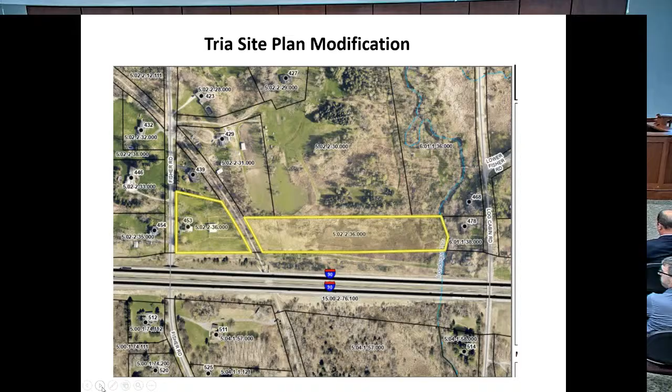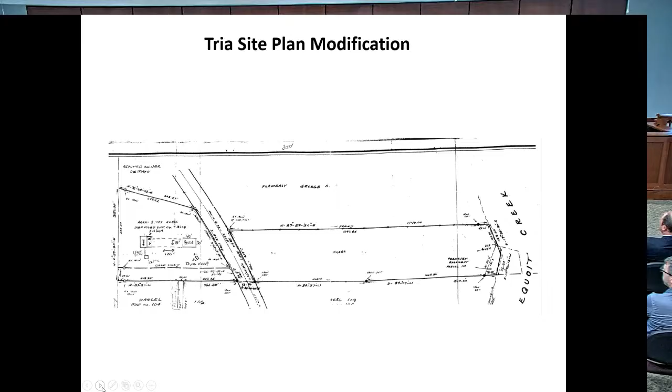Your property is bisected by the Auburn Trail, correct? Correct. Yeah, okay. As I was reviewing this information, I said, I've walked by that place before. So you currently have different farm animals on site. I think you had a horse last time I remember. That was the previous owners. Oh okay, just ducks. All right, just the ducks is what you're looking for.

Okay, so open it up to the planning board. Joe? It looks pretty straightforward to me. Okay, Al? No issues. Okay, Scott? I don't have any issues. All right, I don't have issues either.

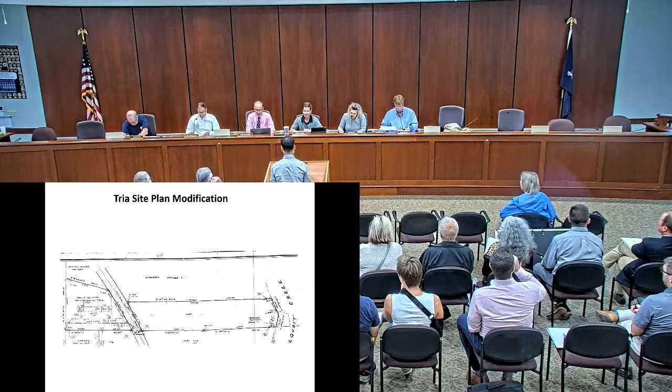It's certainly a perfectly acceptable place to put one, and as I mentioned earlier, you're in an LDD, so that's why you're before us, to give your neighbors an opportunity to comment. So it is a public hearing, and I'll open up the floor. Is there anyone here that wishes to ask questions of the applicant?

Okay, so I do have a question. I'm reading the letter from May 12th about future plans. Would he need to come back to the board for those? And we're only going to approve or not what he's requested, the pond and the fence, today?

Yes, if any of those future plans require approval because it's in an LDD, then yes, he would come before the board. And stopping in at the planning board office could give him guidance on that, right? Okay, yeah, thanks, so all right, sure.

Seeing no one from the public, I'll entertain a motion to close the public hearing. I'll move. Al moves, second? And Joe seconds. All in favor? Aye. Okay, public hearing's closed, unless anyone else.

Wes, any questions, comments? Okay. We did have a draft resolution prepared, so I think without objection, I believe we can move forward with this.

Whereas the planning board made the following findings of fact, and there are six of them, now therefore be it resolved that the application of Thomas Tria, site plan entitled Tria Site Plan Modification, located in the Limited Development District, be approved with the following conditions.

Conditions to be addressed prior to chairman's signature on the site plan: that no final signatures will be given on the plans until all legal and engineering fees have been paid per reimbursement law adopted November 25th, 1996.

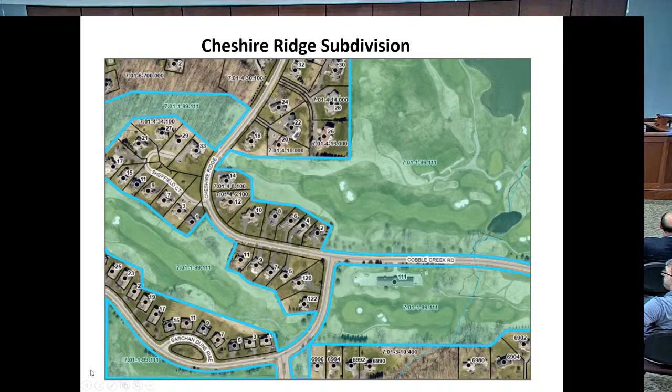Next one up, Cheshire Ridge sketch plan. This is not a public hearing. Applicants requesting acknowledgement of complete application to create 2 new single-family lots on a 3/4 acre site along the south side of Cheshire Ridge, up at Cobblestone. This is the first step of a major subdivision, and only acknowledgement of a completed application will be considered at the meeting.

Good evening, I'm Ryan Destro from BME Associates, here on behalf of the applicant Cobblestone Creek LLC. We are here for a sketch plan application for the Cheshire Ridge subdivision. It's located at Cobblestone Creek. This proposal is for a subdivision to create 2 new single-family lots on .74 acres, as mentioned.

It's along the south side of Cheshire Ridge, and it's in between 11 Cheshire Ridge and 1 Sheffield Court within the Cobblestone Creek subdivision, and the property is zoned residential R-2.

Just to give a quick recap, the preliminary subdivision approval for the overall Cobblestone Creek development was granted by the planning board on June 27th, 1989.

The approval, which included 282 single-family lots, was granted under Section 281 at the time, which is now Section 278 of Town Law, and also Article 5 of the Victor Town Subdivision Regulations.

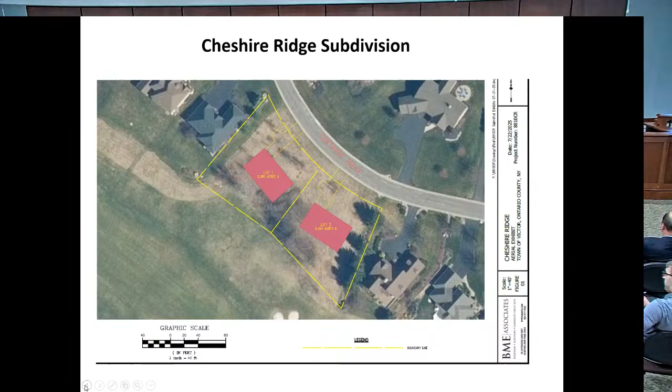Now, while 282 single-family lots were approved, to date, only 270 single-family lots have been created. The existing adjoining lots were established in 1997 as part of Section 4 of the Cobblestone Creek development.

The proposed 2 new lots, as shown on the screen, have been designed to meet all applicable bulk lot standards of the existing adjoining lots as part of the Section 4 approval, with the exception of lot depth.

The minimum lot depth for the new lots is proposed to be 127 feet instead of 150 feet, and this is really just to provide an additional buffer between the Cobblestone Creek Country Club course and the proposed single-family lots.

As such, we will be requesting that the planning board modify the clustering provisions that were established for the existing adjoining lots as part of the Cobblestone Creek development, and this would be to allow the minimum lot depth of 127 feet for the two new lots.

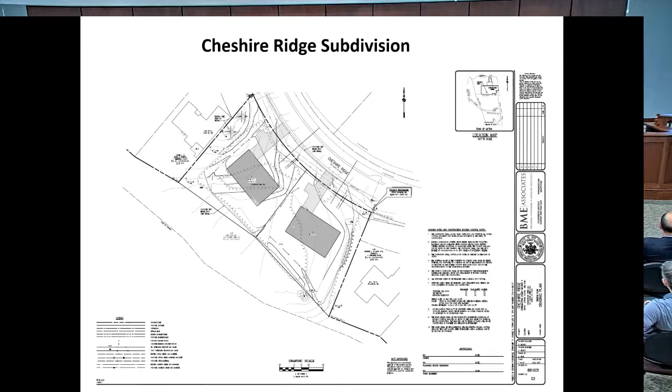With regards to utilities, both lots will be served by public water via new service connections to the existing Monroe County Water Authority public water main, located along the north side of Cheshire Ridge, and then connections to the existing public gravity sanitary sewer system and storm sewer system along the south side of Cheshire Ridge will also be made via new sanitary lateral and storm lateral connections.

With regards to stormwater management, the proposed soil disturbance for the two single-family lots is under 1 acre. Therefore, New York State SPDES general permit coverage for discharges from construction activity is not required, nor are any new post-construction stormwater management facilities required per the New York State DEC Stormwater Management Design Manual.

With that, as mentioned, we are seeking acknowledgement of a complete application for the sketch plan application tonight. We did receive just a couple minor comments from the town engineer as well as the town code enforcement officer, to which we've already responded in writing yesterday in a letter dated August 25th, 2025. With that being said, I'm happy to answer any of your questions. Thank you. Thank you.

We'll start on the left this time, I guess. Scott, anything? I don't have a lot of applicant questions.

The one question that did pop up is relative to lot depth. Looking at your plat, it looks like you have 150 feet on the west and east sides, but 127 in the center.

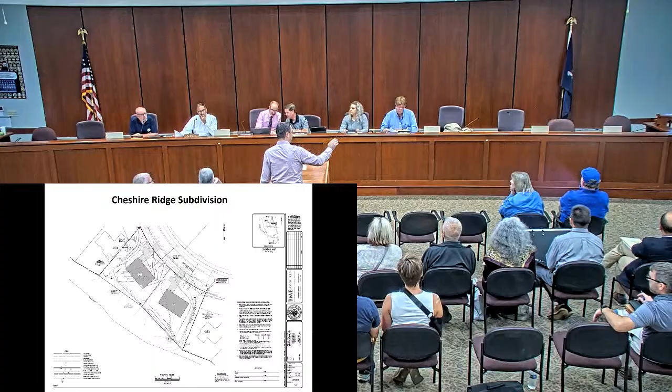You can see the edge of the fairway, and there's a little bit of a drop-off area just over the sand traps on the lower portion of the aerial. So it's really just to provide an additional buffer for those lots.

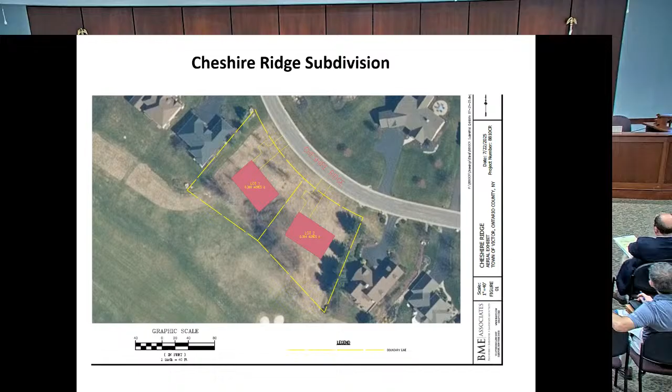Okay, I have no more questions. Al? So were these lots not part of the original plan approval? Correct, we're creating two new lots that essentially, you could make the lot lines effectively any way you would like to. Okay, yep.

No other questions at this time. Okay, Joe? I'm interested in what the town engineer's comments are, though. He's always got interesting things to say.

Well, some of the issues are a little arcane, and I think he's better suited to speak to them. Oh, okay, thanks Joe. Sure. Wes Petty, Labella Associates. So we had a comment letter, we published it on August 15th.

We're just looking to have a short EAF prepared when they submit a preliminary application. And on lot standards notes, there were a few notes on this sketch plan that I had a question on, just looking for them to confirm the proposed rear yard setback.

Supposed to be a foot symbol, it was just a typo. Well, and then in addition to the inches versus feet, the graphic shows a 40-foot rear setback as opposed to a 30-foot.

So maybe we'll double check that. Yeah, we'll check that at preliminary as well. Not a huge issue for sketch plan. And then just identify that the driveway setback should read driveway setback to side lot line.

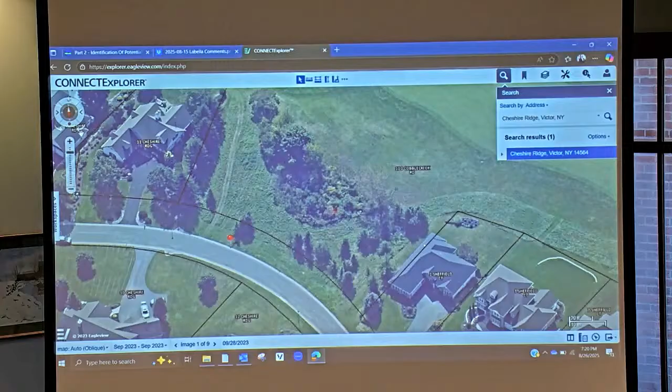Because we really do need to make these lots comply with the town code as much as possible, especially when it comes to a side setback on the adjacent parcel so close to the line. That really restricts their access to the side of the house with anything but a 3-foot wide lawnmower. Just saying - understand, we can only control these two lots, but we'll certainly reach out and see if there's anything that can be done.

All right, did that help? Yes, it did, thank you. Yeah, that's the only thing I see as a major concern from my perspective. Okay, and as Wes indicated, I think we're in pretty good shape for the sketch plan completeness, so we can move forward with your application by agreeing you've provided the complete sketch plan, and then we can move on with questions at the next review.

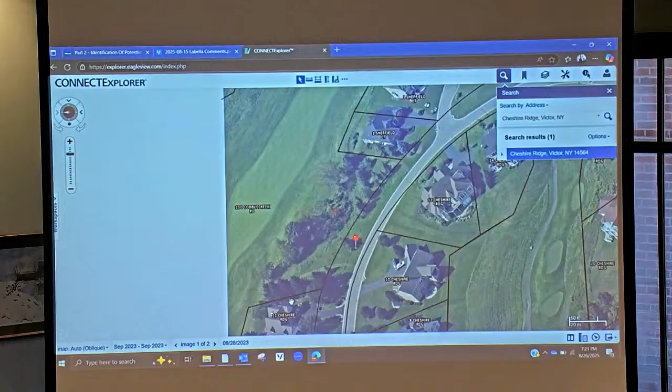So, Wes, did you bring it up? Yeah, I've also got the Google Earth image here. Okay, you can zoom in on that upper left there?

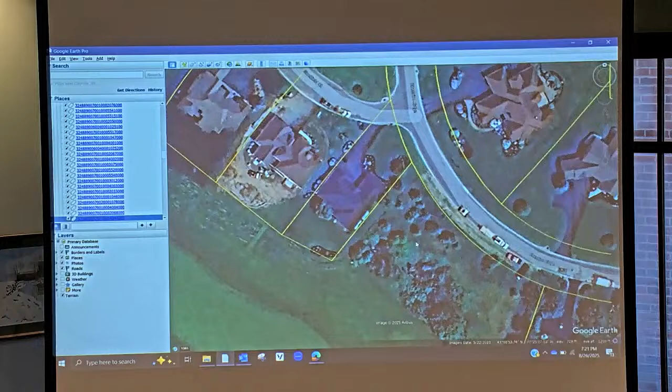So, just for the benefit of those here, this is the lot line, and there's 3 feet between there and the house, but there's a lot of landscaping that - I know these are just tax map lines - has gone quite a bit beyond the lot line, all along the side of the house. So maintenance of that would be an issue, ownership for sure, and I think we really need to address that more formally in the next step of this application. That's my opinion. So, any other comments from the board?

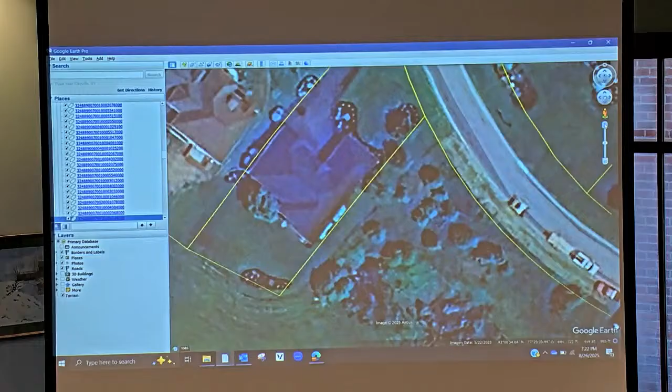Questions? I agree with your comment. Good catch. Okay, having said that, thank you, Wes, for bringing that up.

Susie, can you switch back to the agenda items again. We do have a resolution for sketch plan completeness that we'll move forward with.

On the Cheshire Ridge subdivision sketch plan application, number 1 SK 2025, whereas the planning board made the following findings of fact, there are 6 of them. Now therefore be it resolved that regarding the sketch plan application of Shale Kessler, Cobblestone Creek LLC, major subdivision entitled Cheshire Ridge subdivision, drawn by BME Associates, dated July 2025, received by the planning board July 22nd, 2025. Planning board application 1 SK 2025.

The planning board acknowledges receipt of a complete sketch plat application, and be it further resolved that the planning board secretary forward a copy of this resolution to the applicant. Hear a motion? I'll move it. Scott moves, and Joe seconds. All in favor? Aye. Okay, excellent.

Thank you for your time. Thank you.

The next item is Norbut Solar Farm. This public hearing was closed at the last meeting. The applicant is requesting approval to develop a 4.428 megawatt solar energy facility on a 34.93 acre parcel consisting of forest and meadowland.

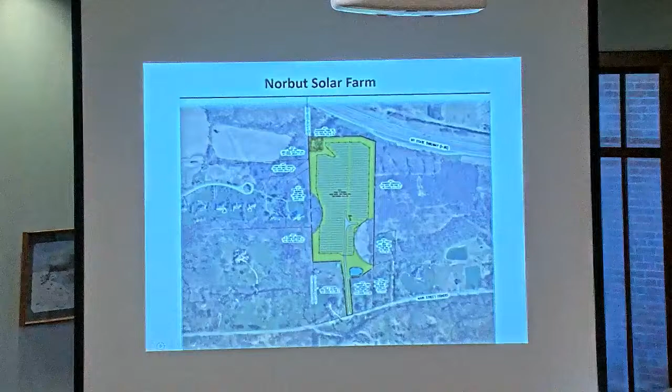One thing I do want to point out, within the first 20 feet of our access drive, there is a 100-year floodplain that clips the bottom portion of our property. Whether that counts as development on the land, there's already an existing driveway curb cut there, but we are going to rebuild that driveway and bring it up to standard.

Yeah, I think that's a good point. It's not something that we've necessarily overlooked in this regard. If you want to acknowledge that as a planning board, that yes, there is a floodplain, it's over a portion of the entrance drive at the intersection with.

The residents have mentioned that the water does run down that driveway. Yep, and there was a concern expressed that the upgrades to the driveway would facilitate water coming down there. So I think maybe that should be a small impact, so we can say yes.

I think Mr. Limbeck, the driveway that the residents have been talking about is this driveway over here that's not associated with our access drive. The floodplain portion I'm talking about is right at our entrance.

I thought the driveway on the property was where they mentioned the water comes running down the hill. Oh, I thought that was the Gray residents that were talking about the water running down their driveway, not ours. No, I think they were talking about it. I could be mistaken, but I thought it was the driveway on the Norbut property.

So we could say technically yes, and no or small impact to every one of these squares. I agree. And if you put yes down, at least you're acknowledging, as James brought up, that there is a very small portion of the 100-year flood zone.

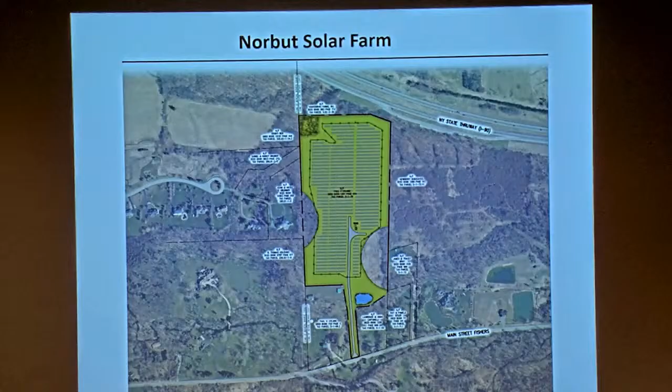Okay, that's it. And Mr. Logan's correct, we're generating energy, we're not using any for this. It says increase in the use of any form of energy, so to me they're providing the ability to increase, but they're not increasing the use of. That's how I interpret that. I'm okay with a no.

Number 15, we're almost there. Impact on noise, odor, and light. The proposed action may result in an increase in noise, odors, or outdoor lighting. Yes, there will be an increase in noise during construction. We don't anticipate odors from the project. We don't anticipate lighting from the project.

Question A, the proposed action may produce sound above noise levels established by local regulation. Answer to that is no. B, the proposed action may result in blasting within 1,500 feet of any residence, hospital, school, licensed daycare center, or nursing home. The answer is no, there's not going to be any blasting. C, the proposed action may result in routine odors for more than 1 hour per day. Answer to that is no.

D, the proposed action may result in light shining onto adjoining properties. A small impact in that regard when we're considering glare. E, the proposed action may result in lighting creating sky glow brighter than existing area conditions. No impact in that regard.

So for the small impact on D, we would also want to note there are mitigating elements of the project. I think what we would identify in the reasoned elaboration is that the project is designed with solar panels that have an anti-reflective coating, and the applicant has also submitted a glare analysis that identifies certain times of the day, certain hours within the day, and certain days within the calendar year when this glare may impact an adjoining property.

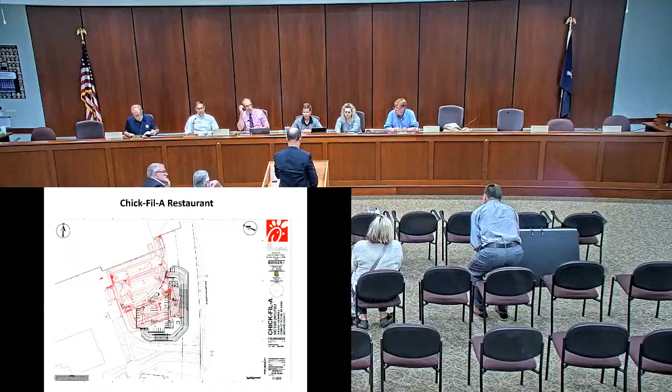Good evening, Mr. Chairman, members of the board. My name's Charlie Gottlieb. I'm the Land Use Counsel for Chick-fil-A from Whiteman, Osterman, and Hanna in Albany, New York. Here this evening with Randy Bebout from Bohler Engineering, our project engineer, and Eric Wright behind me as well, who's representing the property owner, Eastview Mall LLC.

The project is a 5,397 square foot quick service Chick-fil-A restaurant with a dual lane drive-through throughout, located on the southeast corner of the Eastview Mall property. We were previously before this board on July 22nd, where we showed an alternative layout that pulled the building as far out as possible from that no-build area, which is a restrictive covenant on the property.

We did receive the planning board's informal consent on the alternative location, and we were told to come back with the no-build covenant itself for review and approval. Since then, we have also received a building determination from the code enforcement officer detailing out what area variances and sign variances are required for the project.

We do plan, if I have my way, submitting to the ZBA tomorrow, but definitely this week, to further the ZBA's review. We also submitted from Bohler Engineering, to further this board's site plan review, a response to comments we have received thus far, a revised environmental assessment form, lighting specifications, a revised engineering report, stormwater pollution prevention plan, a geotech report, sign survey, building elevations, and a revised site plan set based on this new alternative design.

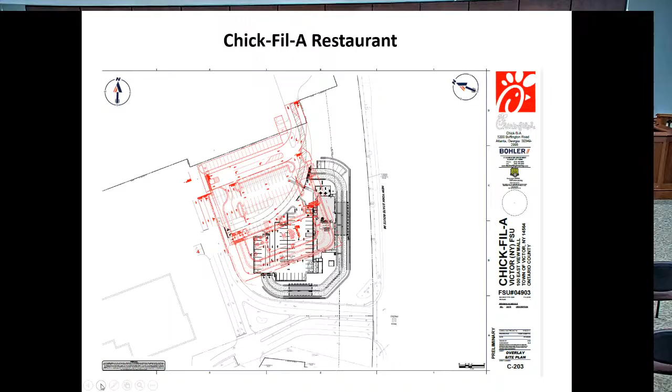You also recently received from my office a submission that did include what we're going to call the second amended restrictive covenant, which sets forth what the new no-build area will be after the project is developed, as well as another revised environmental assessment form, this time indicating that the Zoning Board of Appeals is an involved agency because we need those variances, and also indicating in the description that we are seeking an amendment to the no-build restrictive covenant.

The next steps: we believe that this planning board should serve as the lead agency for this under a coordinated review with the Zoning Board of Appeals, meaning that no action on this project can be taken until this board issues what we hope to be a negative declaration. Tonight, we would like the board to declare that intent, and we also would like your informal straw poll vote on the second amended restrictive covenant that is before you.

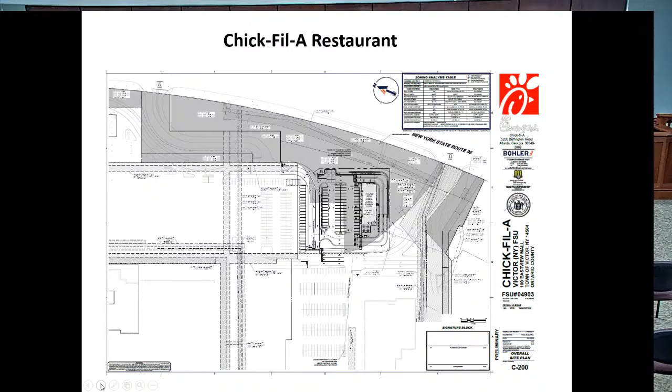We will continue with the planning board until you are comfortable making a lead agency determination. Simultaneously, we will also be going with the ZBA, but the ZBA cannot determine anything until a negative declaration is issued. Once we get the variances from the ZBA, we then come back to this board to finalize your site plan review. So with that said, I know you have a restrictive covenant amendment in front of you. It has been reviewed by Chick-fil-A, by the property owner, and revised based on comments we received from the planning board attorney as well as the planning board engineer. So if there's any questions, we're here to answer them.

Our office worked with the applicant's counsel in preparing and finalizing what's before you as the second amended declaration of restrictive covenant. We are in agreement with its form and terms and conditions. It has exhibits attached, including the old metes and bounds description, the map of the new hatched area, and a metes description of the hatched area being modified. So in terms of its form and content, we are satisfied. It's now up to the planning board as to the substantive nature of modifying the restrictive area.

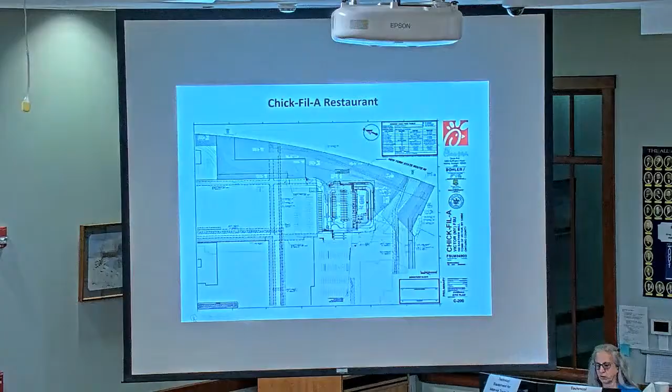And the other comment I had was it's kind of an odd traffic pattern coming out of the Chick-fil-A. Once people have picked up their food on the drive-through, there's a lane that aims right at one of those lanes coming out, right there. Now Susie, do you have any more zoomed-in site plans? Okay, yep.

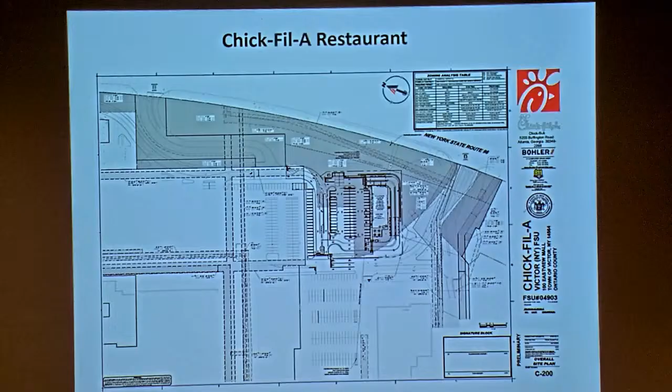I'd like you to look at the traffic pattern in the site coming out. You've got people coming in the entrance that's basically the out entrance from the drive-through. If you look at those two arrows going toward the drive-through, that seems a hazard, because you're telling people to come out and then take a right out to go to the central exit entrance of the mall, and there's cars coming in at that location. I would almost say that should only be a double exit out. This thing right there, yep.

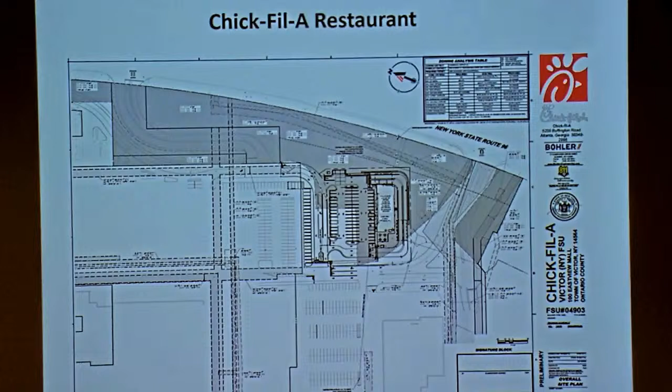I think you shouldn't even have a left turn lane coming from this direction into here, because you're telling people to go to the drive-through down there or coming into the site. They could easily come in and park, or come in and go through, and eliminate this counter traffic pattern.

Yeah, we'll review that. And I know you made a revision — originally the dumpster was in a slightly different place, and the exit — but that was a concern of mine.

That's a good comment. And then just a comment on the grading, all around here, trying to keep the wall at a lower height. And yes, you're right, we are grading in the no-build area.

So to me, it's a significant amount of intrusion into that grassy area. I know there are some pretty large trees in this area, at least, and perhaps over there, that would be nice to try to save. I know they don't have to be right where the wall is, because you can't save them from the root systems, but I want to make sure that this area, which is mowed regularly, can be mowed all the way down to the wall. Yeah, it is a 1-on-3.

Is it? Yes. Okay, so it is mowable. Well, that's all I'm asking — to take a look at it and see if maybe we can save some of it. But those two items I had.

Great, you were looking for comments to address at the next review — that's very helpful. So those are things I thought of since then. So having said that, I think we've done...

It actually is a public hearing, so I should probably make the podium available if there's anyone here that wishes to comment on it. It's not going to be closed yet, so there are other opportunities.

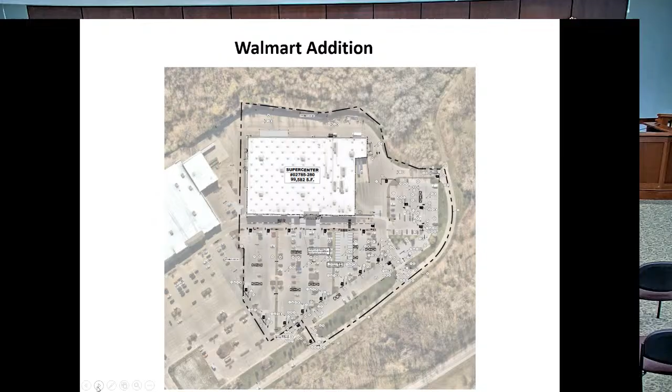The existing store is 99,582 square feet, and I apologize for the amount of numbers I'll read off tonight. The proposed building expansion is 1,974 square feet, in place of the existing asphalt at the rear of the store. The new square footage will be 101,556 square feet, bringing the total retail square footage of Victor Crossing to 335,261 square feet. There will be no impact to any existing green space or pervious areas.

The intention of the expansion is driven by operational needs to sustain current service levels, and it is also intended to improve the online pickup and delivery operations.

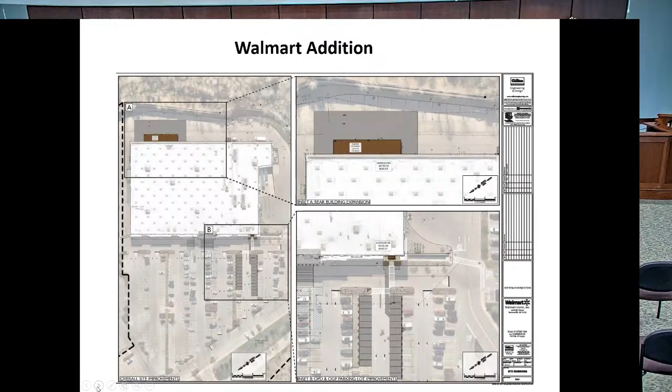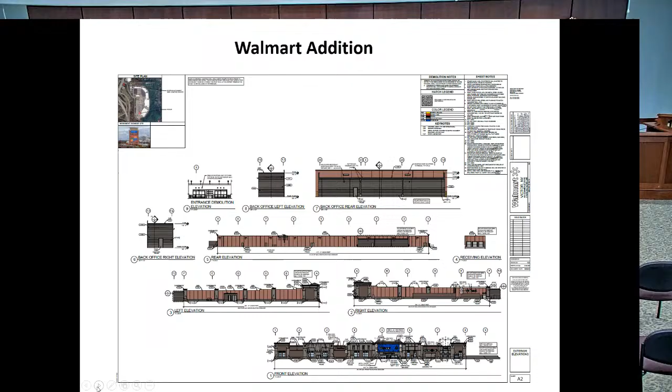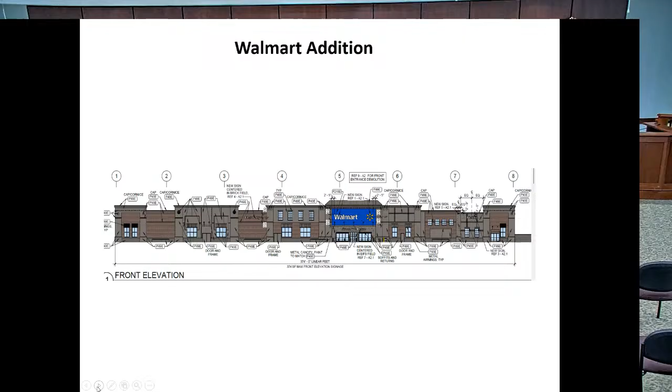The exterior elevation sheet, A2, shows the exterior paint and signage updates. The existing gray color will be refreshed to a slightly darker gray, and behind the Walmart sign will be painted blue in place of the gray background to match Walmart's current brand standard. The total building sign square footage will be reduced by approximately 199 square feet. The signage emphasizes a simplified look that minimizes visual impact while maintaining the brand's visibility.

We are below the maximum allowed foot candle level of 10 FC max at grade. The bulbs will be replaced with LED bulbs without reconfiguring any wiring or placement of the light fixtures. The expansion will also include the required emergency lighting, and the existing rear wall packs located on the back of the building will be relocated to the new expansion wall. Thanks to the height of the retaining wall, there is no light spill beyond the property line.

Fixtures are full cutoff and do not shine above the 90-degree plane, making them dark sky compliant. We would also like to acknowledge that the proposed project seeks an amendment to the board's final environmental impact statement, or the FEIS, to raise Victor Crossing's total permitted retail area from 323,287 to 335,261 square feet, and the individual building size limitation of 100,000 square feet to 101,556 square feet. Walmart remains committed to preserving the site aesthetics, safety, and full compliance with all applicable regulations, and the expansion improves long-term store efficiency to better serve the community. Thank you.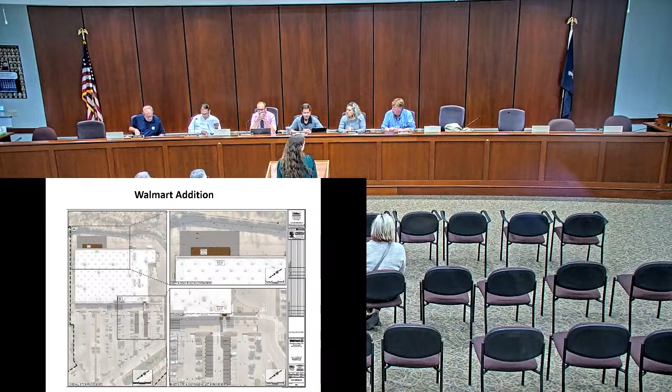Thank you. Questions from the board for the applicant? Joe, we'll start with you.

It's all one, I believe, combined into one application. So we did get the Walmart addition first, which requires planning board approval. The Planning and Building Department also did receive two building permits for lighting and one for signage, which also requires planning board approval. So we had asked Walmart to please combine them since there is a lot with the Walmart. So this was more for you guys as an introduction, because there is still some things missing. But yes, we did ask them to combine them into one planning board submission. So, piecing it together, thank you.

Having said that, because the building expansion itself is on the back side of the building, it doesn't seem to have any impact on slope or lighting. I don't see an issue there. And from what I can see, just looking here, I don't think there's issues with paint or signage either. So, from my admittedly quick review, I don't have anything really further to say.

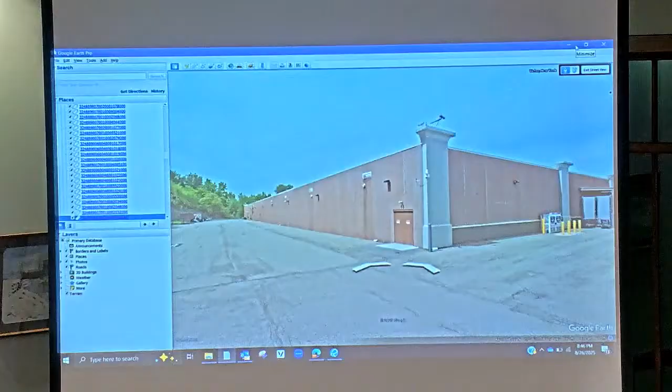Just for the board and the public's information, and if Wes, you could rotate a little to the left to see the wall. Yeah, all right, so if you just do that.

You mentioned early on that the light spill would be below that wall. Absolutely, and it's hard to know unless you're out there looking at it from the back. That's just something I wanted to present to everyone here, that you could get a better sense of what actually would be, by a change in location of those wall packs, which are 40 feet or whatever it is along the backside of that building. Probably, I'm making a guesstimate here, that there would be at least 10 feet off of the retaining wall, where there would be about 1.7 foot candles right there in front of the wall.

So trucks come and deliver back here, right? I mean, is it the far end, or I don't know if these doors are just quick delivery doors? Those will not be, it's emergency egress doors.

Okay, this is the store manager. I'm Candace Brzezinski, I'm the store manager of the Victor Walmart.

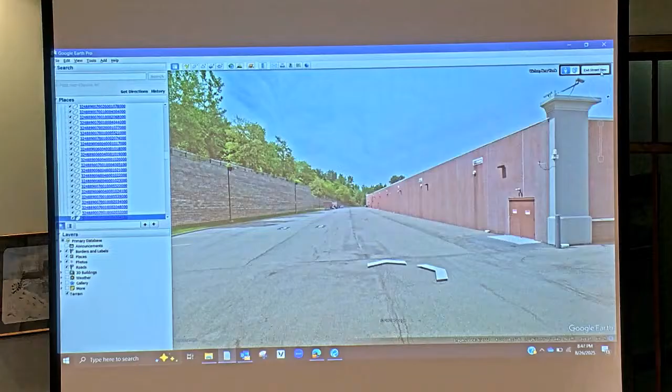We actually do not have any delivery trucks that enter our building from that way. They actually enter from the opposite side of the building, so we have no tractor trailer traffic across that backside. Okay, great, thank you. You're welcome.

Appreciate your being here. This is a public hearing, so I'll open it up to the public. If anyone has any questions or comments for the applicant, now's the time.

Okay, Wes, your turn. Thanks, I just wanted to follow up on the lighting comments that have been offered already tonight.

There is an existing operational hours approved lighting plan with approved illumination intensities. Do you have a copy of that? There's also an approved after-hours lighting plan with the foot candles reduced, some fixtures turned off. Those were a result of the FEIS findings, and I just wanted to see if you have those, because what I'm seeing presented in front of us was a single lighting plan with illumination levels that appeared in some places to be, I don't know if I want to say significantly higher, but higher than what I saw in the operational hours lighting plan.

Yes, originally Walmart has multiple divisions and teams that handle certain sections of it, so the lighting part team did not have a copy of that information. I don't have a physical copy of the plans.

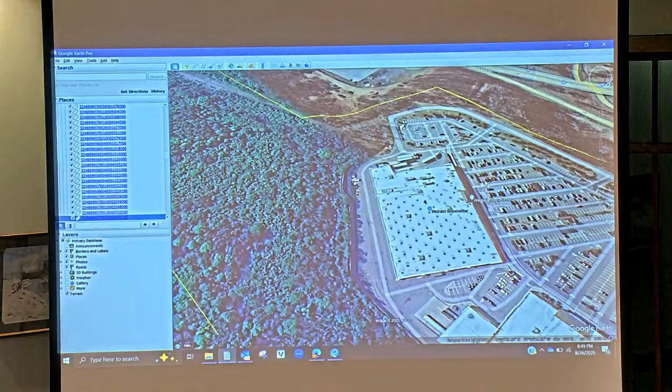I do have this conditional approval document and the FEIS, so I've shared that with them. Unfortunately, a significant revision of the plan wasn't available before. If you want a copy, we can get you copies of those approved lighting plans. I suspect the planning board probably wouldn't want to see a lot of change in the illumination levels at the site compared to what was approved previously.

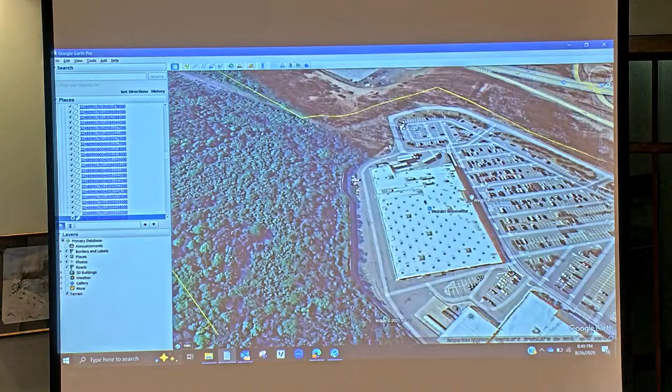Yes, sir. With that, Adam, do you have anything in particular you wanted to chat on with the lighting plan? I haven't done a complete review, but I'd agree with what you're saying, that comparing their lighting plan to the previous approved lighting plans, the levels are somewhat significantly different.

The other thing is, she said they're using the existing poles. I'm not sure how tall those are. I'd have to take a look, but on their plan, they're calling 27-foot tall poles on 3-foot bases. My recollection is 21 to 22 feet, something on that order, not 30. I did notice that today actually when I was looking at it. They didn't have survey information available at that time. They are 25 feet, 3-foot bases on 22-foot poles out there currently.

So with that in mind, back to Scott's comments and concerns, would bringing the lighting into compliance with the existing plans address Scott's concerns? Or do we need to look further at adjusting color temperatures and lumens? That's a good question. Or maybe one step at a time, I suppose.

What we're seeing out there now, compared to what was originally built, is much more intensity. The lights are stronger. Maybe that's because conservatively, when the plaza was first built, they went with a lower illumination than they probably could have, but there were some changes thereafter, as I recall, from a timing perspective.

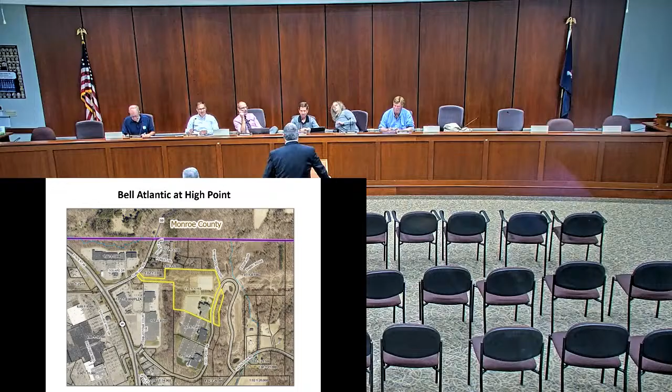Again, we're operating on the Wi-Fi network, but the Verizon phones on top of the hill don't work because, as you know from other projects, the wireless telecommunications facilities for Verizon's network that operate on the 96 corridor are located on the front of the Cobblestone Court building, shining into Eastview Mall. And High Point's up on top of the hill, and the service is poor.

So what you can see there is the existing—one of the questions that was asked is what is the height of the existing tower, our existing light poles. Our engineer responded to me this morning, they're 27 and a half feet. So our proposed pole, a decorative pole designed for hosting wireless telecommunications as a replacement light pole, is 28 feet. So it's a half foot taller with the 2-foot microcell antenna located on the pole.

This site location is chosen on purpose. There are 3 buildings up there, so it's in front of the middle building so that it can reach all 3 buildings. All 3 buildings are actually suffering from a lack of coverage in the building. I know that because I've been in contact with the head of Broadstone Real Estate, who is running there, having difficulty making any type of call out of their building.

So again, it's a fantastic facility to run our office, but we just cannot make calls up on top of that hill. So it's essential that we get it. We're working with other wireless providers to try to get boosters in the building as well. The amazing thing is that this is the first request we've gotten since Constellation built their facility.

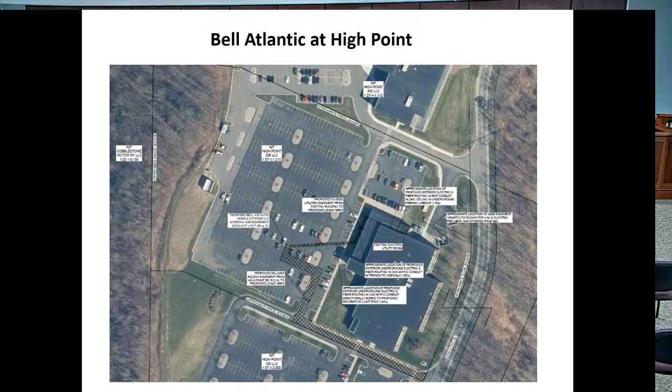Scott, questions? No, I think it's pretty straightforward. I don't have any questions.

Al? Well, the only question I had was, did they explore mounting it on the building, on one of the rooftops, as an alternate to a new pole? We did. They needed to see all 3 buildings, and so placing it—they were originally going to put it on the top of our building, because I called Verizon and said, 'God help me.' And so, as Jeff can attest, instead of putting it on ours, the farthest building, they wanted to put it in the middle to service all of the buildings.

Okay, otherwise no other questions, it seems pretty straightforward. Joe? Normally, with an application like this, we'd be concerned with view sheds and all of that, but given the location, it's not an issue, so I've got no questions.

I agree with all of what you've heard. So, Wes, any questions from your perspective? Nothing too significant. LaBella did issue a letter dated August 22nd, just commented on SEQR for comment number 1—some small revision to the plan indicating a project summary on title sheet Z1 to include that the property is located within Route 96 corridor overlay district. Not really substantive to the physical change to the site. You've addressed the lighting comment about confirming the height of the fixture—that was helpful.